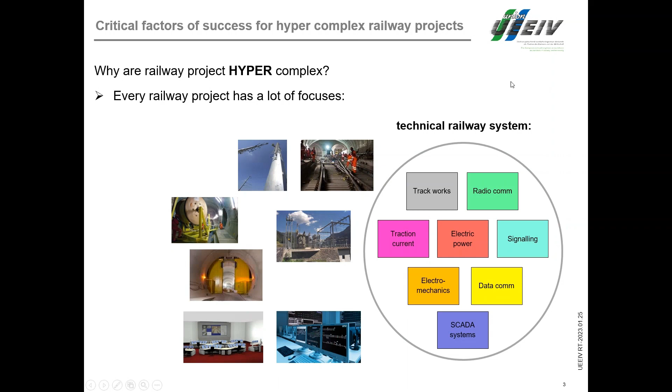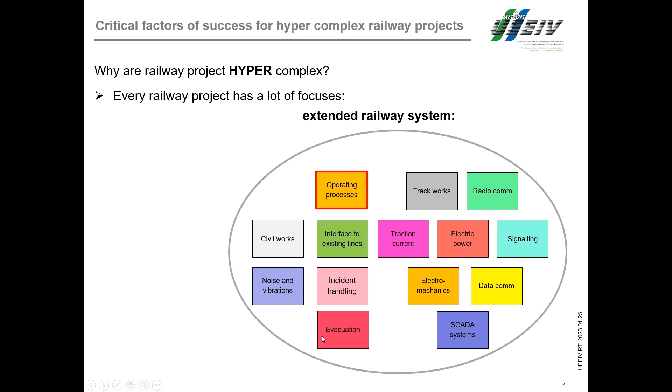Then extend the railway system. The base for a railway project is an operating concept. This causes a corresponding topology. Not to forget that we also need civil work, and there noise and vibration is today a theme. Then without interfaces to existing lines, there is no sense to build a new line. And there, incident handling and evacuation also have to be looked at.

And now, to build such a big project, you need temporary installations. You have to plan the authorization. You have to look at the environmental aspects and also social aspects, naturally project management and cost. Not only project cost, look also at the operating cost. More on life cycle cost you will hear in the next presentation from Nino.

An example: GBT was called for bidding as a functional requirement proposal with 4,800 main requirements. And every main requirement can have sub-requirements. We see up to 400 sub-requirements. And we have tested all these requirements at the end of the project. So you see, that's complex, hyper complex. And you will have to coordinate all these focuses one with another.

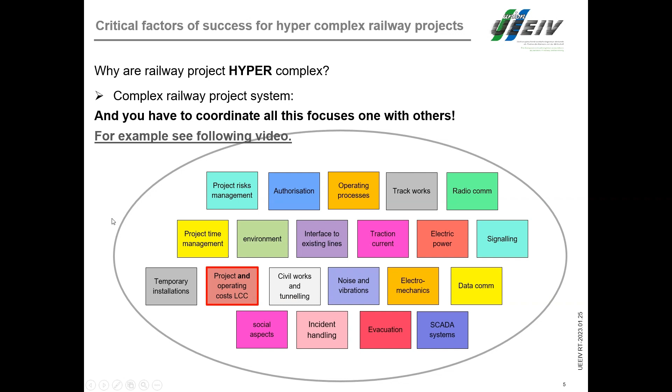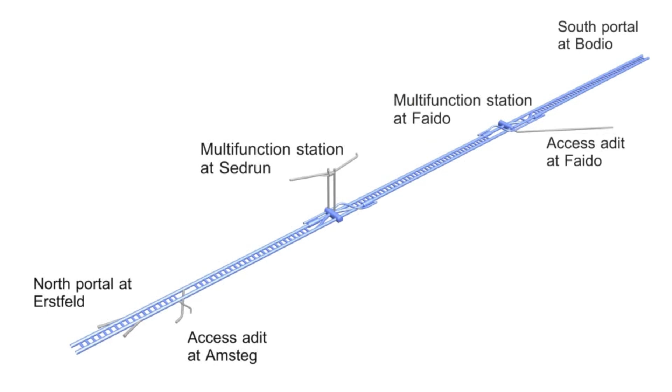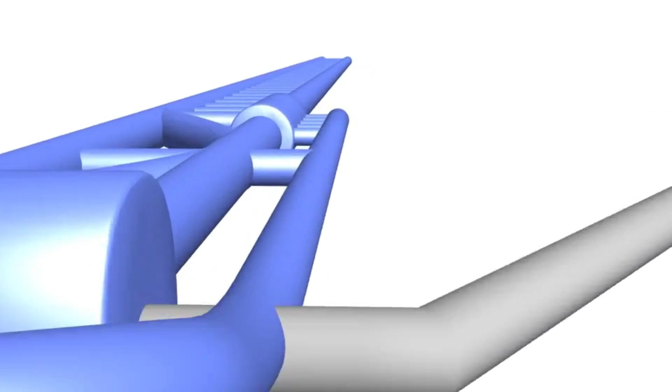For the 57-kilometer-long construction site inside the Gotthard Massif, the railway installations contractor takes over the various sections from the tunnel construction contractors in sequence. Work starts in the south, with the pilot section between Bodio and Faido. First of all, the temporary construction site systems are installed. The cables for the construction site power supply are laid. For telephone communications on the construction site, a landline is installed, and for radio communications, the antenna cable.

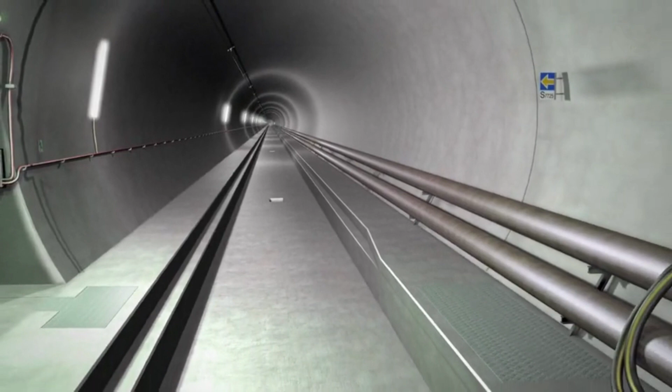Then the cooling system is installed. Every 250 meters, a cooling system can be connected to the water circuit. At the same time, the personnel location system is installed. Sensors in the tunnel monitor all movements of personnel. Installation of the temporary construction site systems is now complete. Installation of the railway infrastructure can begin.

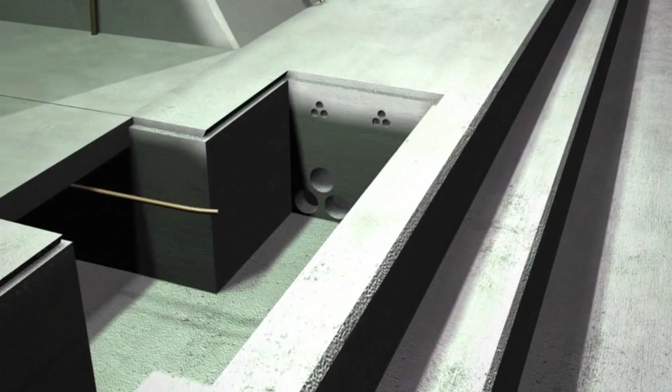First, the medium voltage cables are laid. In the opposite bench, the optical fiber cables are pulled in. At the same time, the handrail with its integrated earthing conductor is mounted. The safety concept also includes independent emergency lighting. The railway track is now laid. Laying takes place in approximately 2,000-meter-long sections.

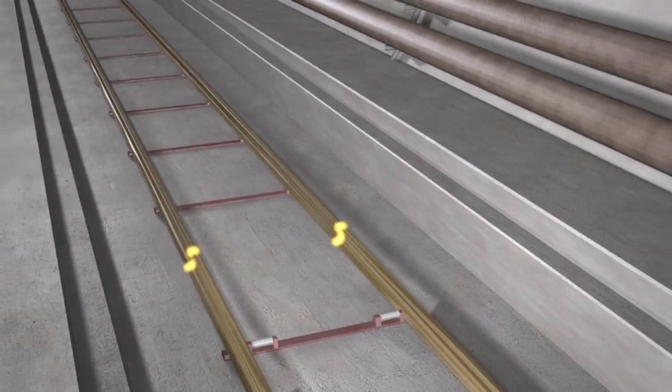On the first day, the 120-meter-long rails are laid. The rails are put into the tunnel on rollers in pairs. They are then laid on track gauges and welded to the rails that are already in place. While the welds cool, the next pair of rails is pulled in. The rails are transported on the temporary track that was created in the laying process. In one day, 18 pairs of rails with a total length of 2,160 meters are laid.

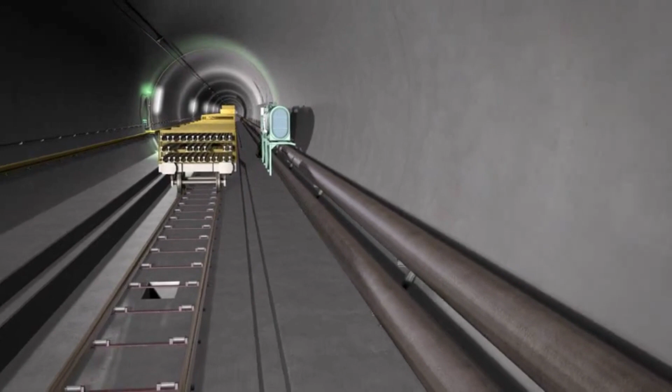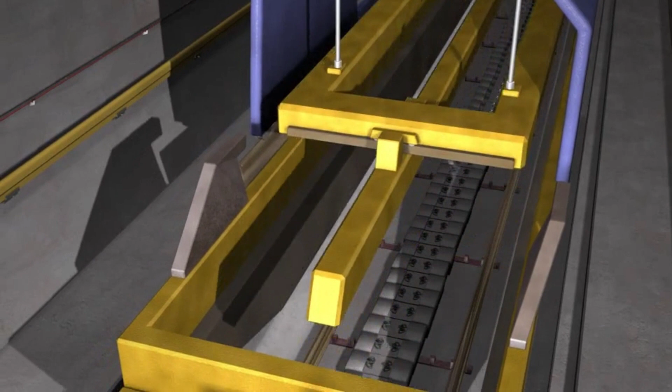When all the rails of a section have been laid, the sleepers are delivered. The 7,200 sleepers for a single section are delivered by train. They are raised by a crane that runs on the train and then lowered onto the floor of the tunnel through the so-called bottomless wagon. When all of the sleepers have been laid, the rails are raised. The sleepers are mounted on the rails. The completed rail lattice is raised and fixed at the sides. The track is then straightened. The track is now perfectly positioned. Concreting can begin.

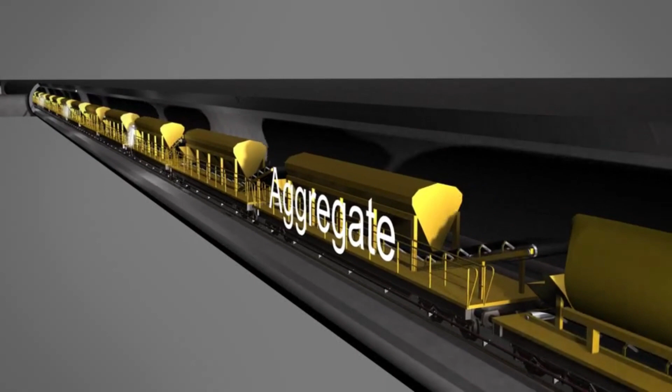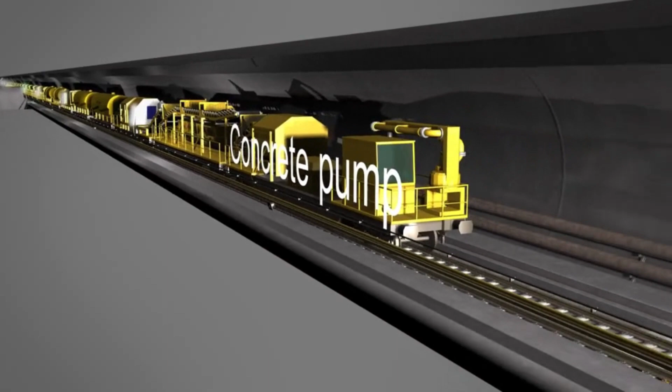The concrete for the track is mixed in the tunnel. The concrete train brings the individual components for 2 shifts to the construction site. At the construction site, the railway wagons deliver the components via conveyor belts and pipelines to the concrete mixer. The concrete pump supplies batches of 5 cubic meters of concrete to the concrete transporter. To protect the straightened rails, the transporter travels on the benches. It feeds the concrete to the distributor. The continuous supply of fresh concrete to the distributor allows 15 hours of uninterrupted concreting in 2 shifts. An average of 200 meters of ballastless track are completed per day.

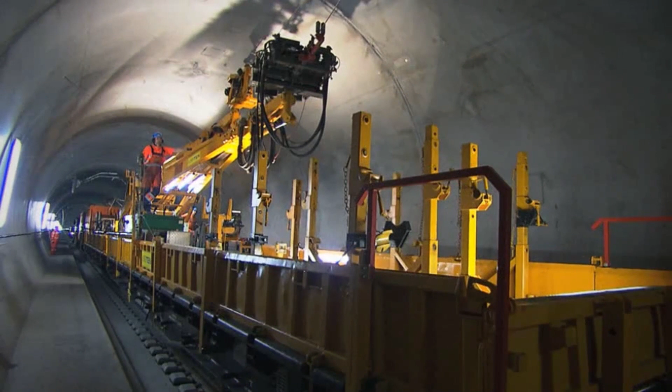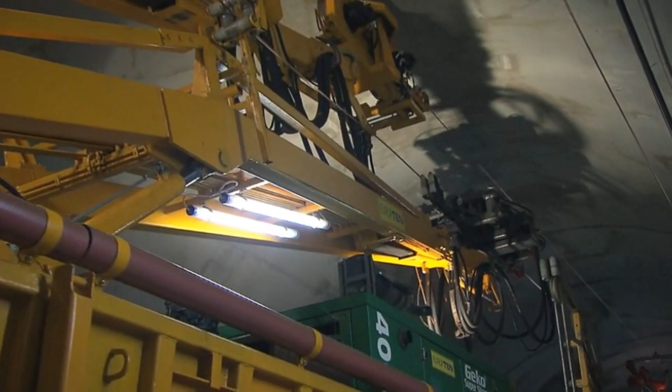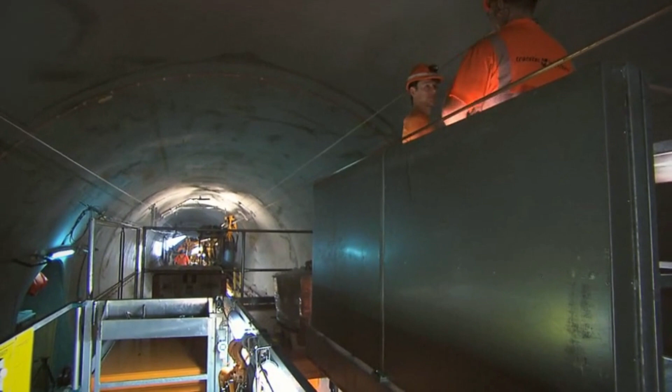When the track is complete, the overhead conductor is installed. The conductor wire and suspension cable are unrolled from the moving train and brought into position in a single work step. The installation technicians then fasten the suspension cable to the supports that are already mounted in the tunnel. A total of more than 110 kilometers of overhead conductor and railway track are being installed in the Gotthard base tunnel.

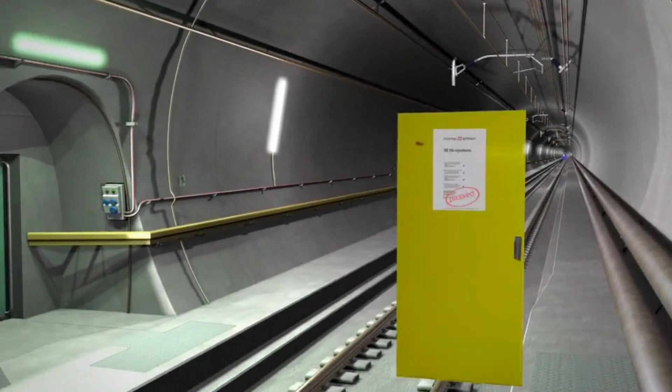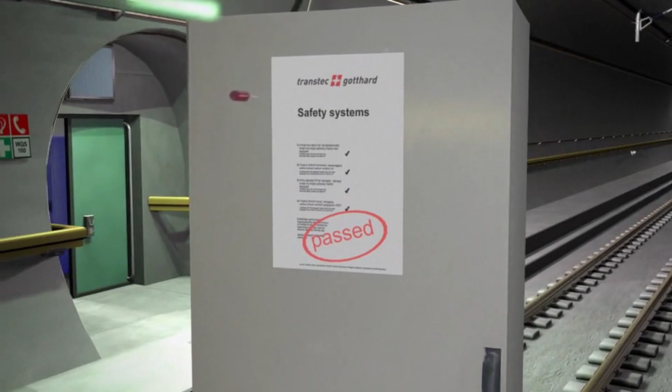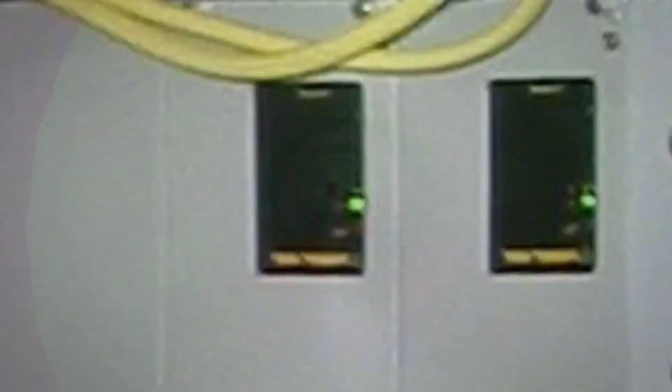The installations for the 50 Hz, telecommunications, and safety systems are delivered fully assembled and tested in cabinets. The individual control elements are delivered as box-in-the-box modules. This prevents the sensitive electronics from coming into contact with the dusty air. In total, more than 2,400 cabinets are connected with optical fiber cables. When the Gotthard base tunnel is fully operational, trains will regularly travel through the tunnel at up to 250 kilometers an hour.

So I will continue. One remark to the personnel location system. During the construction phase, this was mandatory because we are in a tunnel and the firefighters had to know exactly how many persons they had to evacuate from there in case of an emergency like fire. So now,

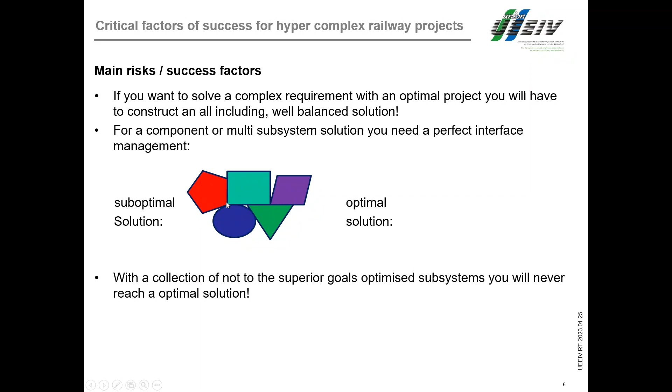next success factor. A complex system had to be planned and realized as a well-balanced, all-including solution. With a collection of subsystems not optimized to the superior goals, you will never reach an optimal solution. This is a picture. You have all subsystems, but the interfaces are not optimized to the overall system solution. It should look like this. And to reach this, you need interface and integration management from the beginning on.

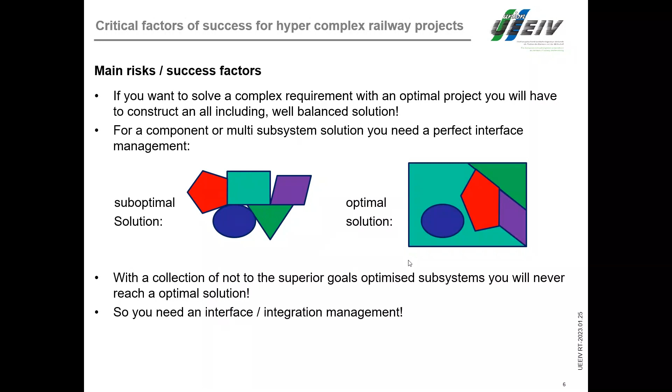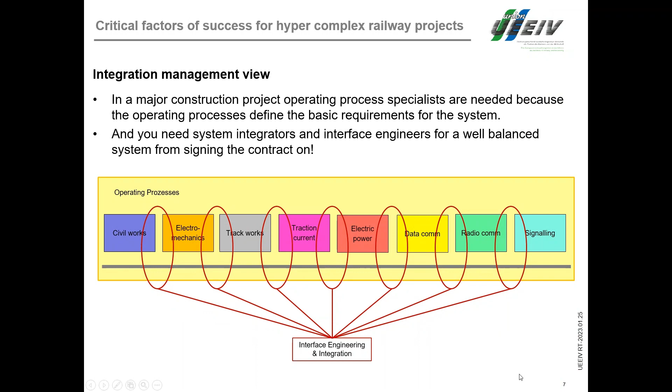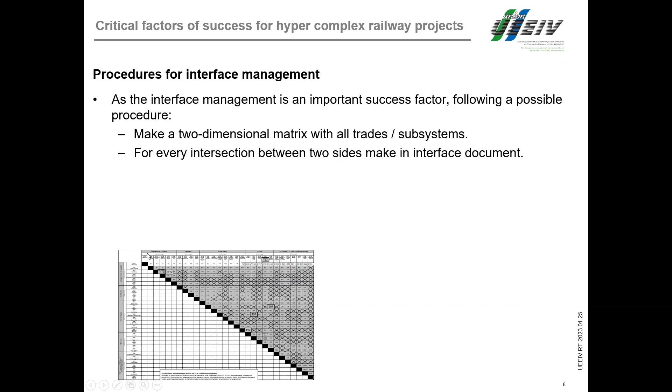Interface engineering is a kind of integration planning and design. In a major construction project, you need well-experienced engineers to coordinate the trades with all other trades. One possibility for the interface management is to make a two-dimensional matrix with all trades and subsystems, like the example below. And for every intersection between two sides, make an interface document.

This interface document is the collaboration contract between the two partners, and at minimum it should contain timeline, responsibility, technical requirements, localized requirements, and be signed by the partners. And if the facts are changing, this contract has to be updated. Even if there is no interface between two possible partners, this has to be documented and signed by both sides. This is the header from our interface documents in Gotthard Base Tunnel. And the crossed fields are the detected non-existing interfaces.

In Gotthard Base Tunnel, we had two simulation laboratories, one for the tunnel SCADA system. The tunnel has more than 70,000 data points, and one for the railway, the signaling data system.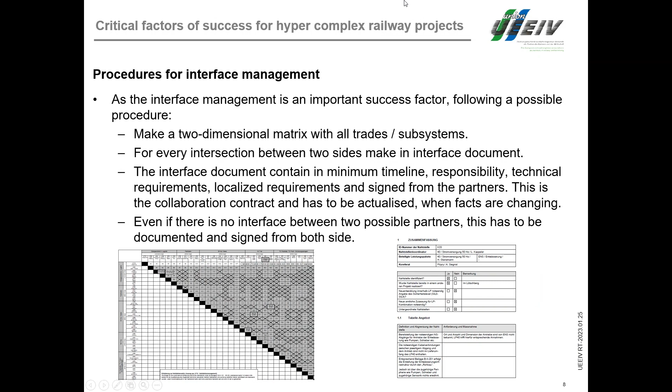So, requirement to the project. One other success factor is the language. If two different trades are speaking English, then it can be that the same word has different semantics, and this gives misunderstanding. So you need an interpreter to prevent misunderstanding.

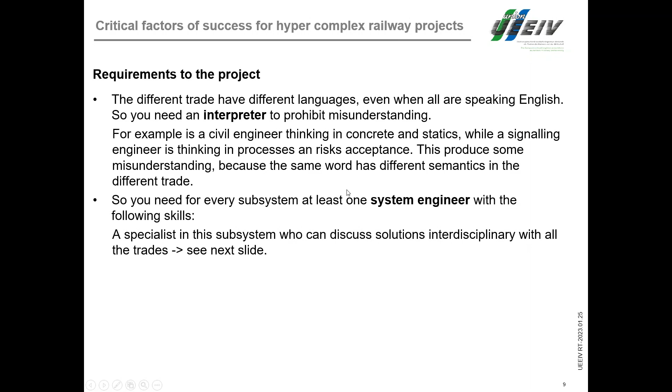And you need a system engineer in every subsystem who is a specialist in this subsystem, but can also discuss interdisciplinarily with all the trades. And as a general project manager, you need a systems engineer who has the overview over the whole project. In smaller projects, this can also be the interpreter.

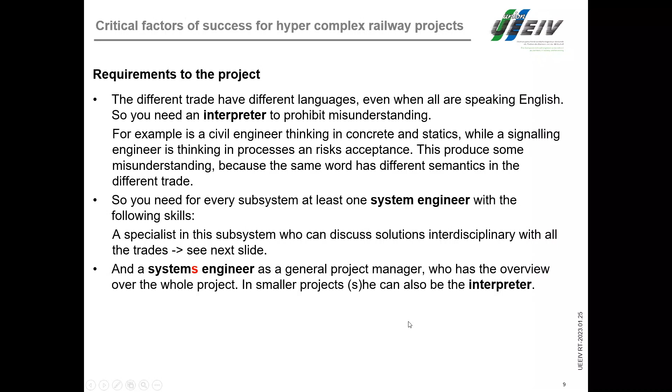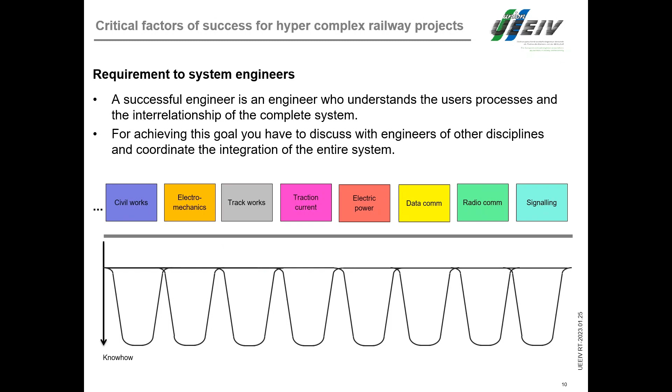Two additional remarks to RAMS. If you use RAMS for the first time, you have a substantial initial effort to develop the model. But this model you can reuse in all the next projects. And the big advantage of RAMS is a sensitivity analysis of the severity for incidents, error, and loss. For example, a signaling light loss is severe. One of 150 lighting lights lost is not severe. You will hear more about RAMS in the next presentation.

Do you see the screen? Yes. Yep. Okay.

Okay, my speech will be based on two main subjects, which can be considered sometimes ancillary, but in effect they are not. Having assessed what Daniel made us understand about the importance of having a strong and comprehensive organization with process specialists and system integrator.

Two aspects. The first is related to the operator perspective. Basically, the operator's eye during the design phase, because the operator will undertake the operation and maintenance activities, and at the end of the day is responsible for targeting key performance indicators which are defined during the design phase.

I'm referring, for example, to the layout of the tracks, the position of the depots, the position and the number of stations, and many others, radius curve and so on. All these parameters, let me say, should be compliant with the timetable, because the operator will be responsible to target this kind of key performance indicators.

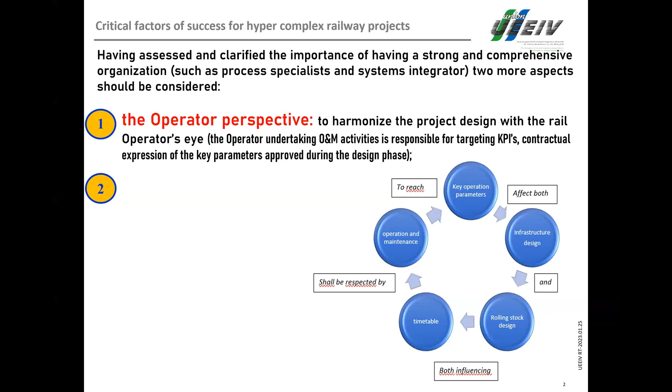This is one aspect. The second aspect, as Daniel already mentioned, is the life cycle cost approach. So the importance to have a methodology adopting technical and functional references. We will go a bit more in detail about these technical and functional references, pursuing cost-effective solutions on a long term, specifically the life cycle of the assets, during the maintenance service and the operation activities.

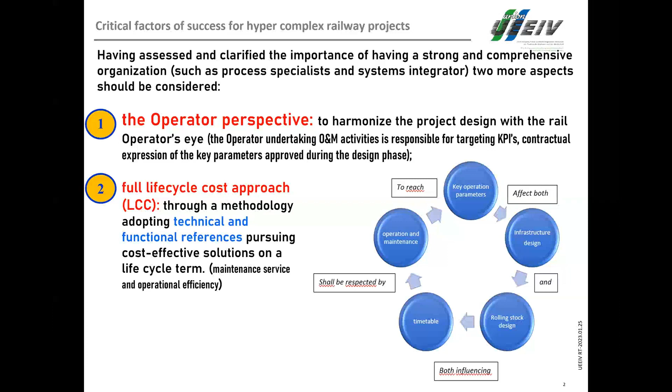And we have to say that RAMS methodology, RAMS disciplines cover well the two aspects that we are mentioning.

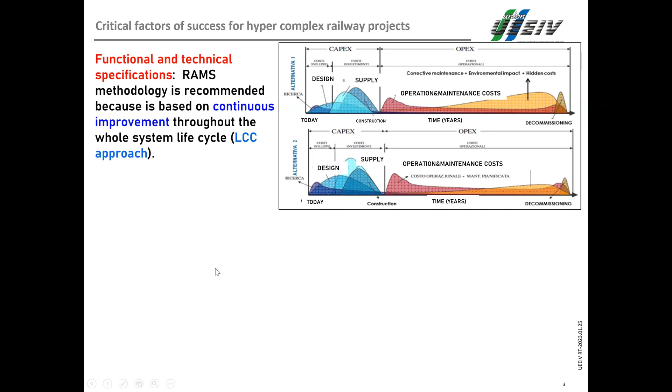Sorry, I don't know why. Okay.

As Daniel was saying, RAMS is an engineering discipline that is looking at the quality of the rail services through a number of characteristics or parameters which are defined at an early stage of the design in order to make this compliant with the future services, rail services and transport.

Finally, RAMS management also focuses on the railway risk. This is another important part of the monitoring and control activity done by the RAMS discipline, because we know that railway risks have a potential to cause injuries and/or fatalities in staff and passengers, environmental concern, damage to assets, properties, and so it is important to have this kind of discipline.

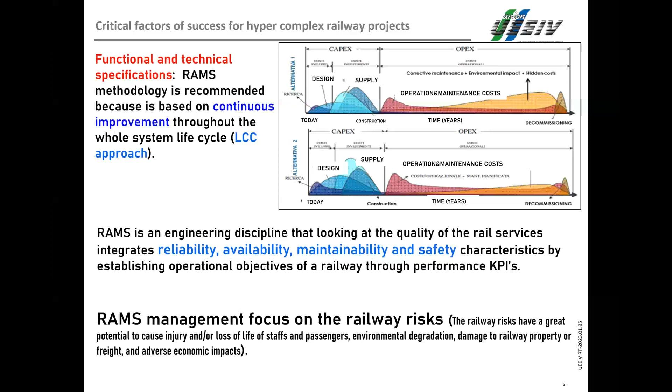For example, the mission profile, so the working schedule of the rolling stock once in operation, daily utilization, the duration of the life cycle, expected life of the asset, the warranty period, the calculation rules for service reliability and availability of the assets, but also the safety constraints of the hyper-complex railway project, the frequency of the diagnostic data flows in order to have a robust monitoring system of the assets.

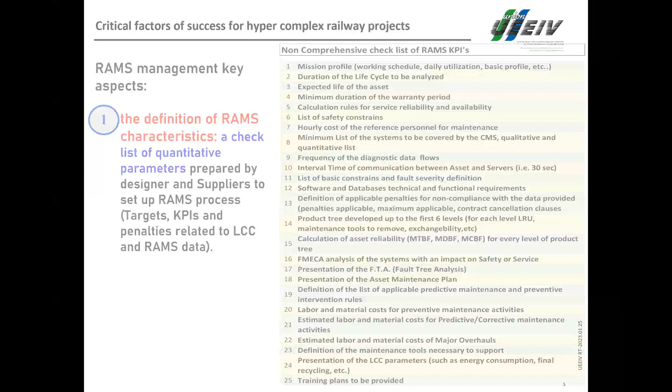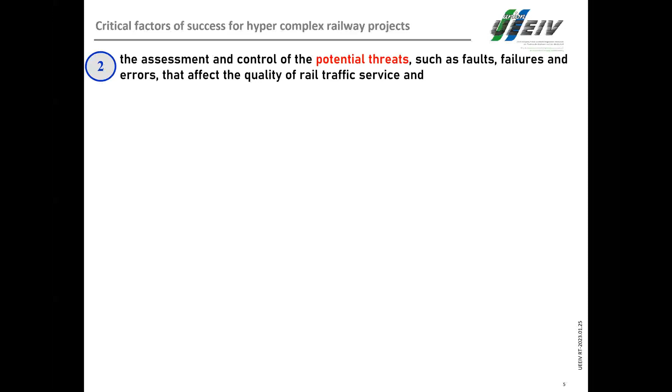This is one aspect. The other important aspect is related to the controlling procedure, which is embedded inside RAMS to monitor and control the potential threats, such as faults, failures, and errors that affect the quality of the rail traffic service. So once again, we see that our definition of RAMS parameters is focused on the future services of the rail, to be defined at the beginning, and also the provision of controlling processes such as failure prevention and fault prediction.

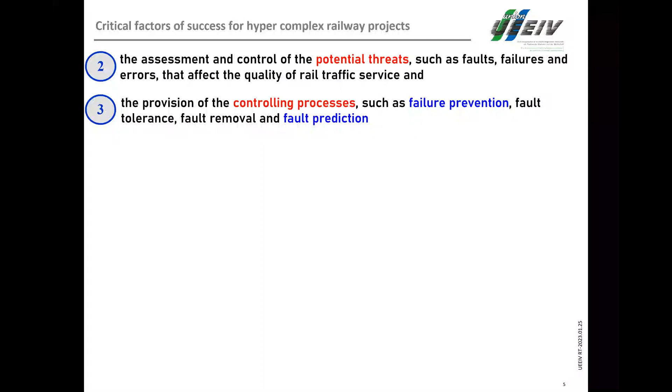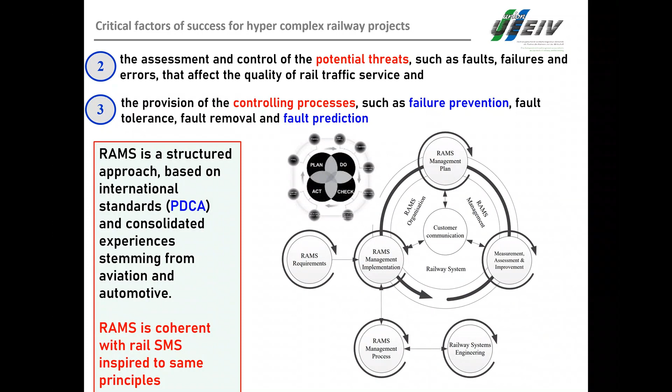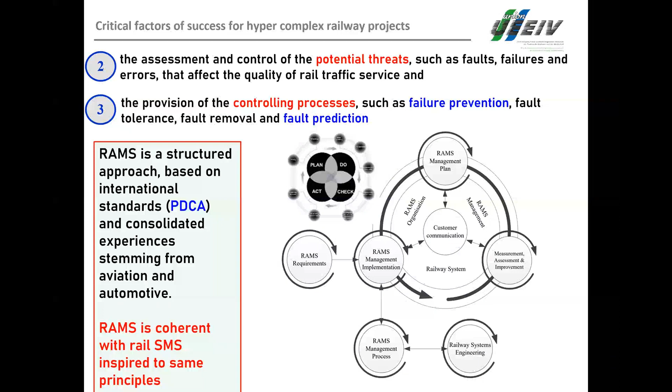One part of my presentation will be devoted also to an example of application of RAMS parameters to the maintenance model, specifically a very innovative maintenance approach, which is predictive maintenance. Now we will go in more detail to see how this maintenance, called maintenance engineering, is a new approach based on RAMS, and so, pursuing a cost-effective solution during the operation and maintenance activities, has the following benefits.

This methodology is a maintenance process that goes beyond corrective and beyond preventive. Beyond corrective because it tries to fix the failures before they happen. And beyond preventive because the maintenance is no longer based on kilometers or based on time, but it is based on the real health of the assets or components of assets, because the assets are strictly monitored through diagnostic systems. One of the parameters of the RAMS is related to the frequency of the diagnostic data, when they should be sent from the ground to the control room.

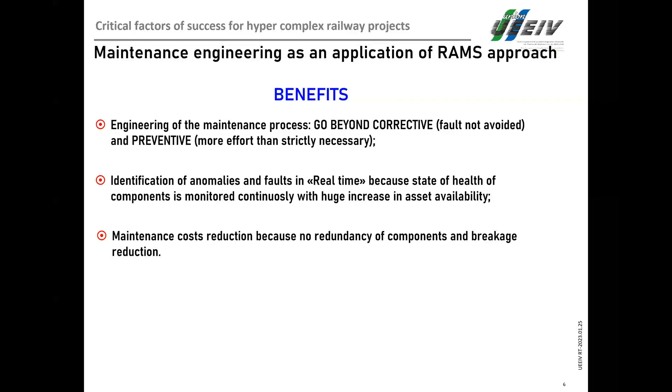All these maintenance, sorry if I rush this, but we have to be short in our presentation, but I am available to reply to every question.